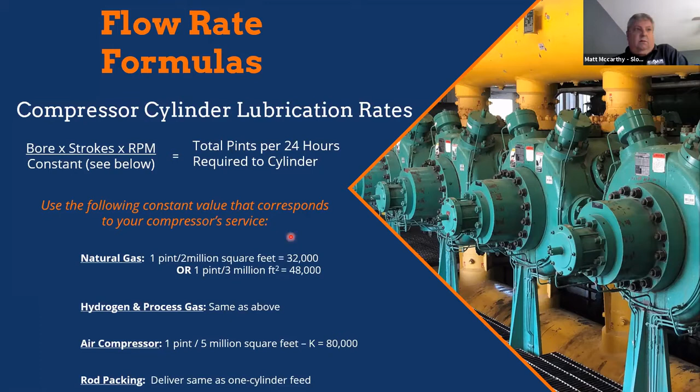If you're on that integral engine, if you're involved with those, then the power cylinder lubrication gets calculated out as well. That's part of a dual zone system where we're doing compressor lubrication and power zone lubrication.

Power zones are calculated by using the brake horsepower of the engine times 8, which is 8 pints in a gallon, times 24 hours in a day. Then we divide that by a constant provided by the manufacturers. For example, in the Cooper-Bessemer GMW series, that number is 7,500. The resultant answer is how much oil the engine needs totally, and that will be divided evenly amongst all the power cylinders.

And then on each power cylinder, it will be divided evenly amongst the number of feed points on each power cylinder.

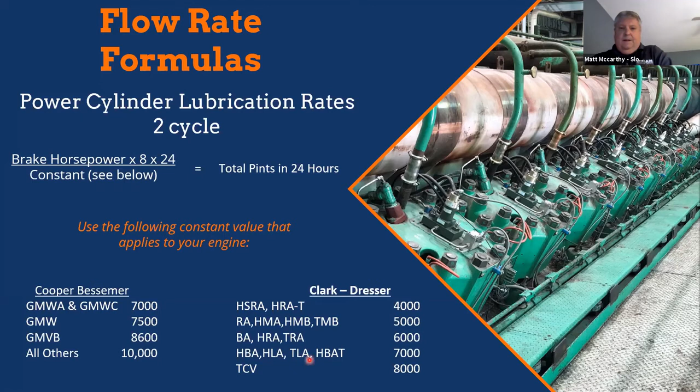Now, if you're doing a 4-cycle engine, such as an Ingersoll KVS, KVR, there's only valve guide lubrication, and for those we calculate 0.05 pints a day per valve guide.

So in our example here, this is a Cooper GMVC. It is an integral natural gas engine. That means, for those not familiar with the integral side, that this is the engine integrated with the compressor cylinders, which come out on the left side here, and then they're banked down along the crankcase. So we're lubricating dual zone in this situation, power zone and compressor zone.

And in this specific instance, we have all of our lubrication equipment just lined up on the end of the engine for easy access and visibility.

The lubricator box, which is part of the component that drives and force feeds the oil down into the system, is typically driven by the engine. We can also drive it by an electric motor. We can control it in our tri-sync systems. We can have integrated PLC packages that completely run the whole unit off engine.

In this particular example, we've got 2 zones, as I said, one for power, one for compressor. So we have a pair of pumps for each zone that are adjusted to the proper flow rates based on our calculated requirements. These pumps individually feed divider blocks.

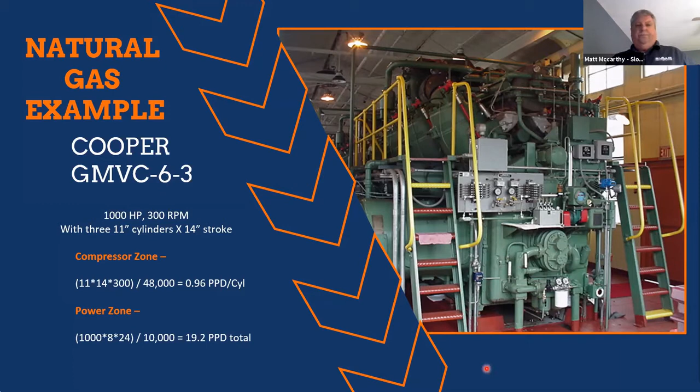Now, if you were calculating out the power zone, we're going to use the 1,000 horsepower times 8 pints in a gallon, times 24 hours in a day. We're going to divide that by the OEM spec 10,000, and we're going to provide to the power zone a total of 19.2 pints per day total. And then we're going to divide that up among the 6 power cylinders evenly. So that's where our calculations come from.

How do we get it in there? Well, we're going to force oil through from the lube pump through this divider block mechanism, which meters and delivers the oil in the proper proportions.

Now, in the old days, there was a pump for every lube point, called pump to point. Today, it's divider block lubrication systems.

In the old pump to point system, operators would adjust each pump to see a drop of oil in the sight glass drip at a certain fixed frequency. 10 drops every minute would deliver 1 pint a day. So if you needed half a pint a day to feed your packing case, you'd adjust that pump to 5 drops a minute.

Over time, that changes. Pumps wear, or maybe it wasn't locked in and vibration starts to make the pump adjust differently. So a pump can clog up, a pump could go bad. And there was no way of knowing if a pump wasn't delivering the proper amount. So if an operator went by every day to take a look, he had to measure every one of those feed points.

On that example in the Cooper, we're going to have 6 cylinders with 2 lube points on each one. That's 12 pumps. Compressor side, we're going to have 3 cylinders, another 6 pumps, plus the packing cases, another 3. So we've got quite a number of pumps and quite a number of drips to be looking at.

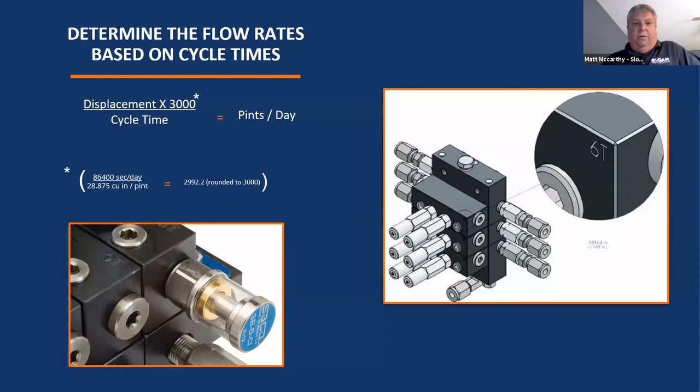Now, in order to know that this system is doing the job we expect it to be doing, we need to do a lot of testing of the divider blocks on a routine, regular basis, and make sure our pumps are in reliable condition.

So in order to know that the divider block is working right, we provide this test criteria recommended on an annual basis. The parameters are that we take a divider block, which is on the engine, take it off, and put it on a test stand.

We connect in our hand pump or a purging pump, and we flow oil through the divider block, seeing visually that oil comes out of all the holes - a very nice, slow, gentle flow through the block, simulating the pump that it's connected to when it's on the engine.

Now, once we verify that the block can flow free to atmosphere, it takes less than 500 pounds - in a brand new block we're seeing 200 or 300 pounds to cycle. So the delivery pressure for the hydraulic fluid going through the block cycles and moves all the pistons at less than 500 pounds.

The next step is to cap off one line at a time and force a failure by simulating a plugged line. So then we'll pump up the oil to 3,500 pounds and let it sit for 2 minutes. And we want to make sure that oil does not bypass and bleed around those internal pistons or those spools.

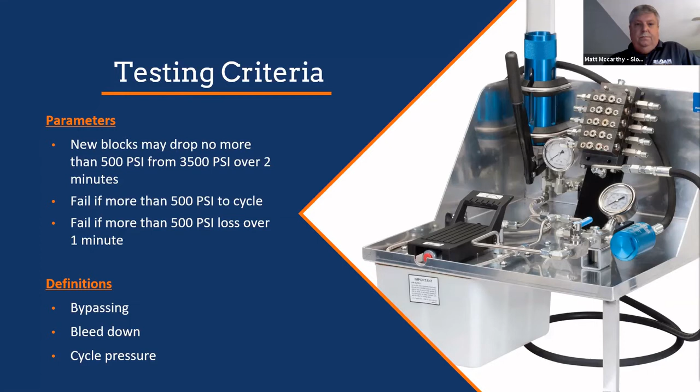So again, we verify first that the test pump is good and in working order. Remove all the lines from the block, connect the test pump, and run a purge to get the air out of the block. Pump slowly and watch for pressure less than 500 pounds. Block the outlet with a cap, pressure to 3,000 or 3,500 pounds, and time it for a minute. Test each outlet consecutively, one at a time. You can't put caps on all the outlets, pressure it up to 3,000 pounds, and wait a minute. That's not the way it's done, although that's a common misconception in the field.

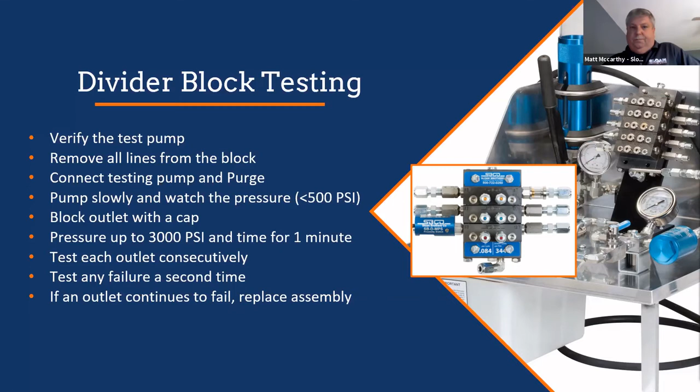So, troubleshooting lube systems. From our experience, the first steps often taken in troubleshooting only do more damage. This is due to the fact that very few mechanics have real world experience with these systems. Typically, a lube system is installed in working condition, fed oil, and it just runs for years as is without any testing. So when something does go wrong, oftentimes the mechanics don't have any experience with the systems and need to turn somewhere. Make sure that we have a good line of communication with your people, and we can walk you through any troubleshooting.

So in that system, there's a protective rupture relief between the pump, which can generate 8,000 pounds pressure, and the divider blocks and the terminal checkpoints. Between the pump and the divider block is a safety relief valve we call a rupture disc. The rupture disc is designed typically on our systems to rupture at about 3,000 pounds. So if a line downstream is plugging up, or a check valve is starting to fail, as the pump continues to pump oil downstream, it's going to raise pressure if you can't deliver oil against one injection port.

So as the pistons jam up against the downstream blockage, the pressure rises in the system. And before something breaks, like a pump blowing off its mounting, we're going to rupture the relieving valve, as you said, at about 3,000 pounds. That'll safely vent that excess pressure back to atmosphere pressure, and it's fed back into the system. So once that rupture disc is blown, no oil is going to get downstream to any of the divider blocks or any of the lube points.

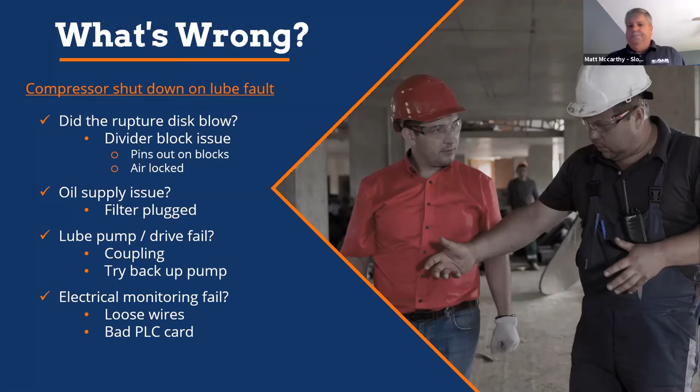So emergency repairs - another critical factor is how prepared are you for emergencies. Spare parts are critical in an emergency. Do I have the spare parts necessary? How long can I be down? Do I have time to fix this? Do I have the skills to fix this? Do I have 5 engines in a row and I can afford to take this one out of service?

If I've got 2 units running and I've got to have them both running, I need to have the skill level to be able to do the repairs on site. I need to have the spare parts necessary to do the repairs immediately. What can I substitute in a pinch? Can I take a divider section that's a 6T and put it where there's a 9T? All these issues...

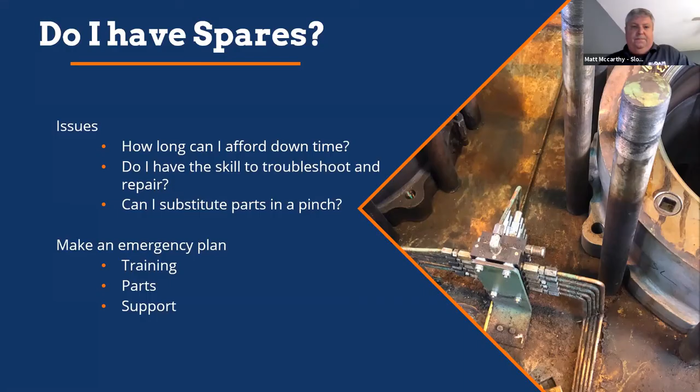But to prevent emergencies, the best thing to do is have a regular maintenance plan in place to be able to test divider blocks on an 8,000 or 16,000 hour basis, to be able to replace pumps, repair pumps, test pumps, change divider blocks, and change rupture discs. So what we recommend is an annual maintenance program.

Filters, we need to change filters, replace the rupture disc every year. Rupture discs see cold starts, and it's one of the least expensive components in the complete loop system. It's a whole lot better to change that rupture disc once a year than to have it fail prematurely.

Test those divider blocks according to our testing procedures. Again, you need to make sure you have good operational testing pumps so you can provide that maintenance on site. Switch pumps, go from that built-in spare to the operating pump, switch back and forth so the spare doesn't always sit idle. We want to operate those pumps on an annual basis. Turn one off, turn the spare back on.

Check the lube box reservoir and change the oil. Change the gear reducer oil. If you've got an electric motor driven lubricator, we want to change the gear reducer oil there. And if you have a day tank that supplies oil to the lube system, we want to inspect that day tank and make sure it's not full of contamination.

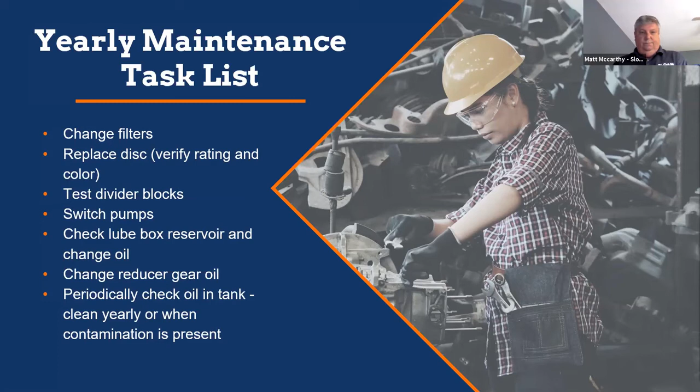So for lube rate reduction, we've got all these components in place to properly deliver the oil per our calculations, and we know our systems are in good shape. You always want to make sure that's the case before you start a lube rate reduction program.

So our flow rate constants for those compressor cylinders we talked about before was a pint in 2 million square feet, or a pint in 3 million. Today, we've been able to provide the industry with our Tri-Sip lubrication system, which can actually reduce oil flow rates to a pint in 20 million, or even as much as a pint in 30 million square feet.

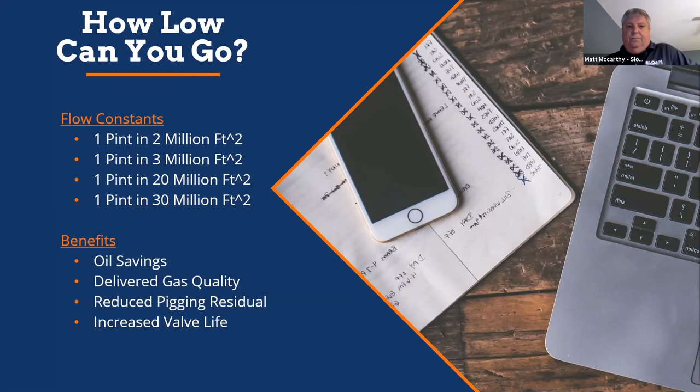So the Tri-Sip package, we're doing a case study where by the end of 2020, we're going to have 134 units installed on a gas system line.

The projected savings, this will reduce the oil by about 36,000 gallons of oil usage over the system over a period of a year. Obviously, if you're putting that much oil into the system, you're going to have to pig it. You're going to have plugging regulators with the oil in the gas stream.

You're going to have filter coalescer changes more frequently, and even clogged pipelines. You're running a pipeline that's been collecting oil in the low spots through the mountains. It's just clogging up the pipe and allowing less open volume for the air to flow past this oil, so you have to pig that out.

The Tri-Sip lube package will increase the delivered gas quality to your customer and increase the compressor valve life. So give us a call if you want to talk about how we can further reduce your oil using the Tri-Sip lubrication system.